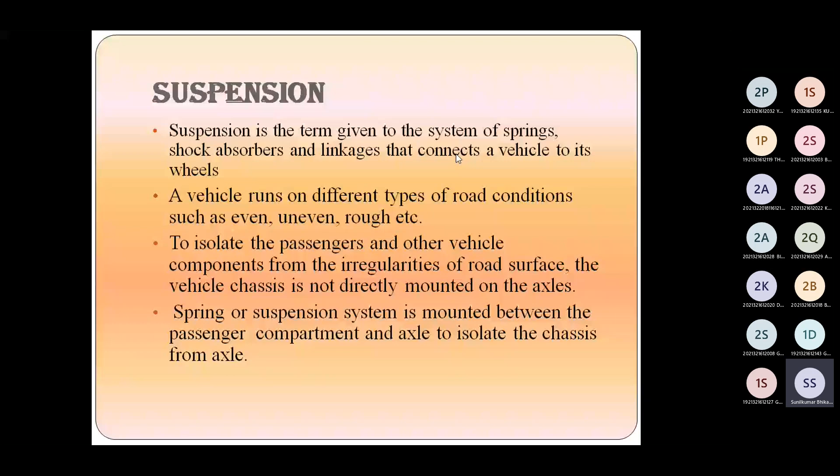In between that, there must be a suspension system, spring bar suspension system, and it is mounted between the passenger compartment and axle, because the passenger must get a comfortable ride, to separate or isolate the chassis from the axle. Okay.

Now this is one layout of the suspension system of an automobile. In this layout, as in the previous lectures we have studied the steering system: steering column, steering wheel, then at this end the steering gear, most of the time a rack and pinion mechanism. Then tie rod, knuckle arm, all those things are there.

And see over here, the suspension system. Here a MacPherson strut type of suspension system is shown. We'll study one by one the different types of suspension systems used depending on the type and application of the vehicle. MacPherson strut is an independent type of suspension system that we'll study very soon, this lecture or next lecture.

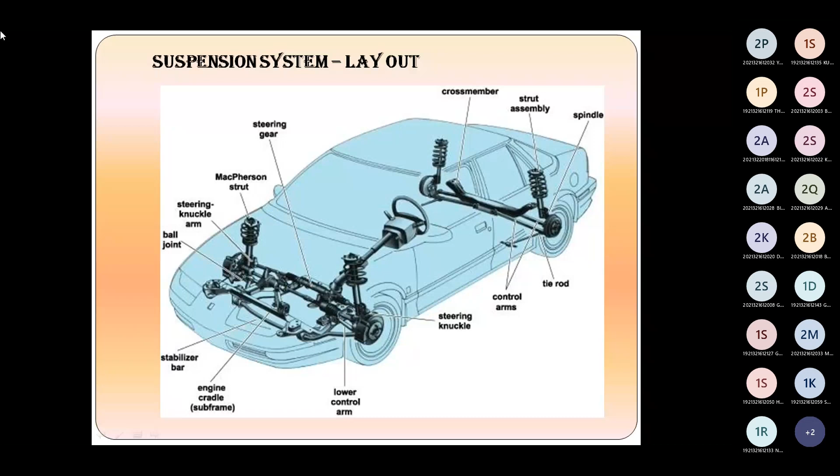Now, if the vehicle runs on an even, regular or perfectly flat road surface with no irregularities or obstacles, suspensions would not have been necessary. But roads are not always flat.

According to Newton's laws of motion, as you have studied, all forces have magnitude as well as direction. So the forces that occur possess magnitude as well as direction.

As you might have experienced, when you take a ride in a vehicle and a bump occurs in the road, what happens? It causes the wheel of that automobile to move up and down perpendicular to the road surface. So because of this uneven road condition, the wheel moves up and down perpendicular to the road surface.

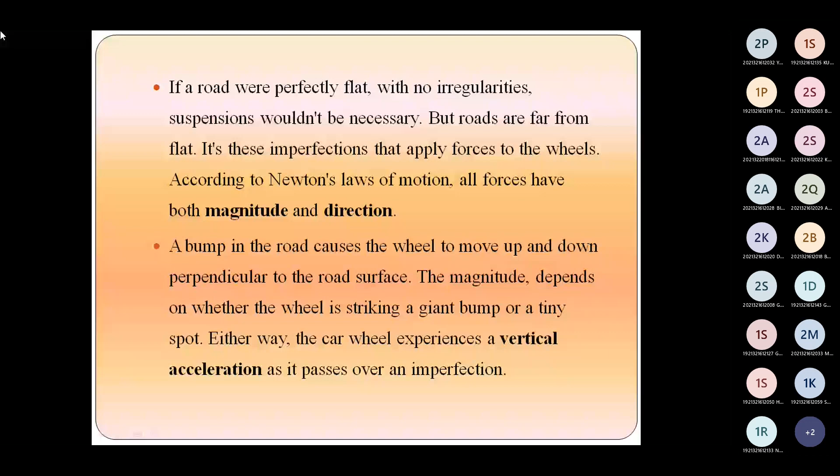Now see, this is the road surface over here. This I have got from How Stuff Works. You can check this website, How Stuff Works. There you can find various interesting topics covered with the help of PDF and some animations also. So our normal road is shown in this first case.

This is the road surface. Now this is even road surface, but whenever a bump or a speed breaker is there, the vertical movement of this particular wheel will be there. So here a dotted line is shown and here an even road surface is there. So this wheel is traveling in between these two areas, this height, normal height and road surface.

But whenever a bump occurs, this wheel jumps vertically up, then in horizontal direction. Afterwards, when it comes downward, see here horizontal acceleration is shown. Whenever it crosses this bump, the vertical acceleration will be there.

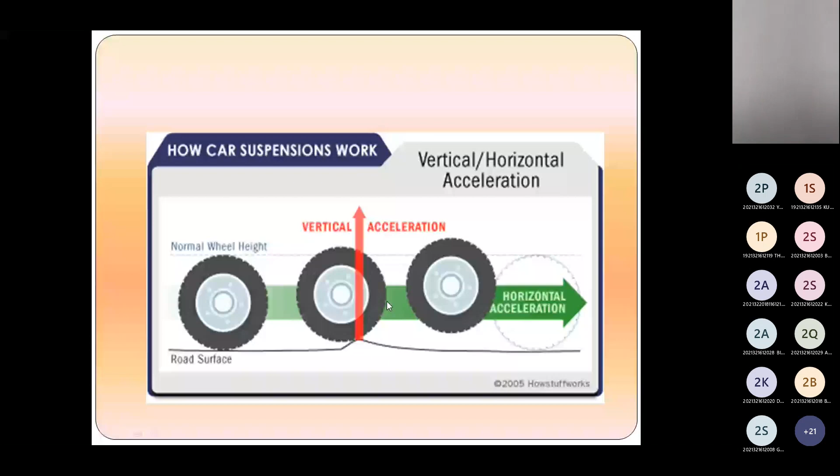Now, why is this suspension system incorporated? This suspension system is installed to give safety to the passengers. The persons or occupants, when traveling through a vehicle, because of uneven road condition, imperfections, and irregularities, the road produces shocks and those shocks get transmitted to the occupants inside that automobile. So to give safety, protection, and a comfortable, smooth ride, the suspension system is installed.

The next objective is to avoid or prevent the road shocks from being transmitted to the vehicle frame and other components. If the road shocks are not properly absorbed, there are chances the frame could break. So damage will be there, and if the frame gets damaged, there are chances of design failure and accidents. So the road shocks that occur during the ride on uneven or irregular surfaces, being transmitted to the vehicle frame, are minimized or prevented.

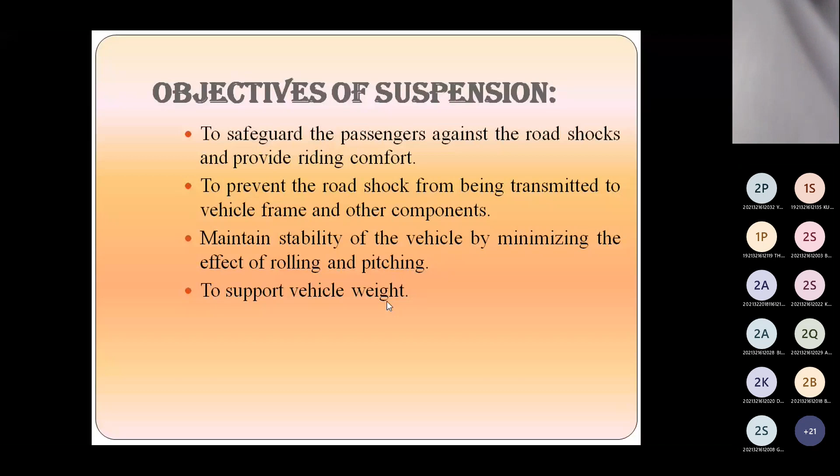Now there are three particular terms: bouncing, rolling, and pitching. This word bounce back, I hope you are familiar with it. So what happens in bouncing, or how will you define this bouncing phenomenon, this term bouncing?

When a vehicle moves on an even road surface, and all of a sudden it comes across a bump, a speed breaker, or a pit, or depressed land, or lower side road, then it is subjected to vertical forces. Different types of forces are there depending upon the road irregularity. So depending on that, either tensile force or compressive force will be there, and because of this, the vehicle starts vibrating.

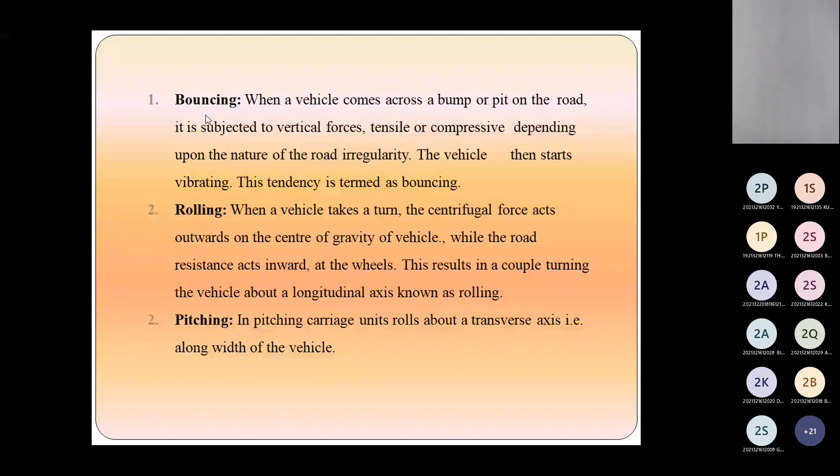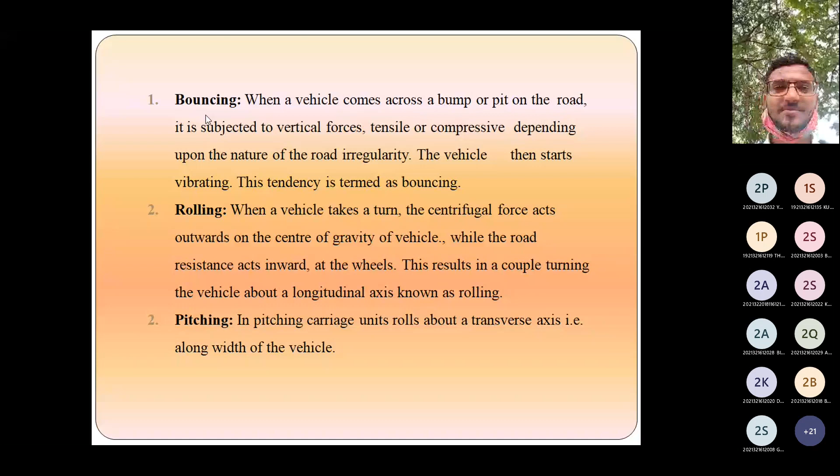You might have experienced this whenever a vehicle passes through a speed breaker, where patches are there, and when the driver moves that vehicle without lowering the speed, tries to run it as usual with normal speed, then you may experience these vibrations in the automobile. This particular tendency is known as bouncing.

Now second is rolling. Rolling is related with the vehicle whenever it takes a turn, either on left side or right side. When a vehicle takes a turn, the centrifugal force acts outwards on the center of gravity of the vehicle. Two forces are there, centrifugal as well as centripetal. The centrifugal force acts outwards on the center of gravity, and at the same time the road resistance acts inward at the wheels.

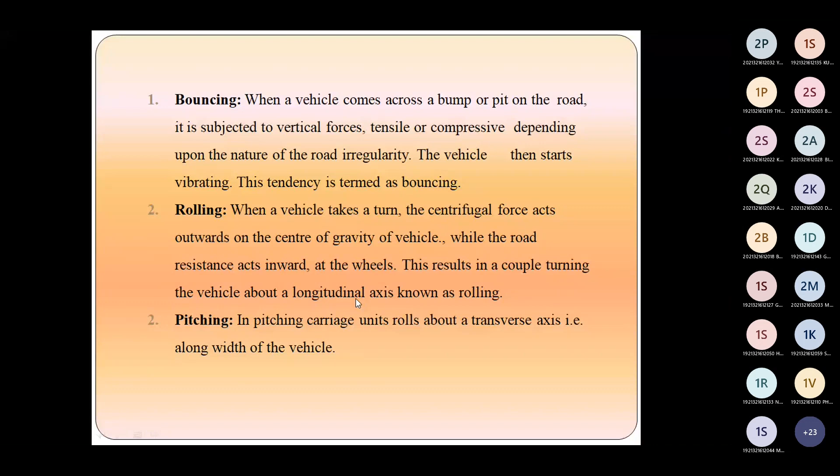What happens because of these two particular movements? This results in a couple, turning the vehicle about a longitudinal axis, and this is known as rolling. When a vehicle is trying to take a turn, centrifugal force as well as road resistance come into action, and because of these two things, a couple is produced about the longitudinal axis, that is known as rolling.

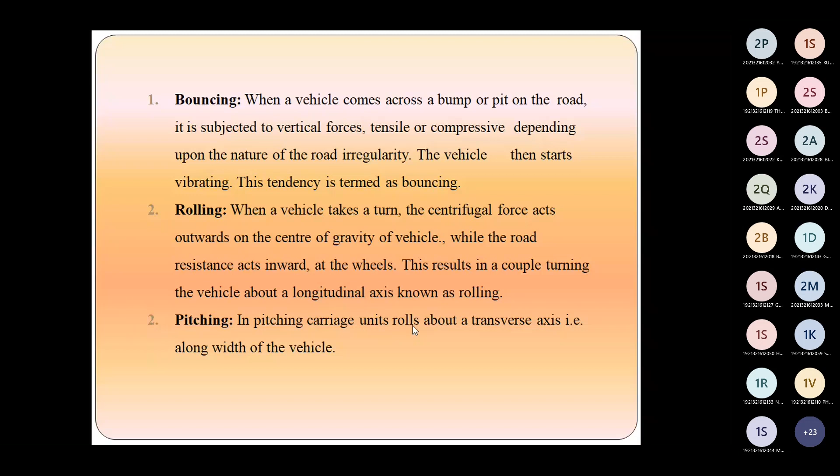Now pitching. The vehicle or carriage carrying the passengers or goods is known as carriage. In the pitching phenomenon, this automobile rolls about a transverse axis. In the earlier case it was a longitudinal axis, now it's a transverse axis, meaning along the width of the vehicle. So this is pitching - rolling taking place about a transverse axis, along the width of the vehicle.

So these three terms you have to remember, because in interviews or vivas in mechanical engineering, you will come across these three terms - what is rolling, what is bouncing, what is pitching. At that time you should be able to draw these sketches and easily explain what exactly is happening in these three phenomena.

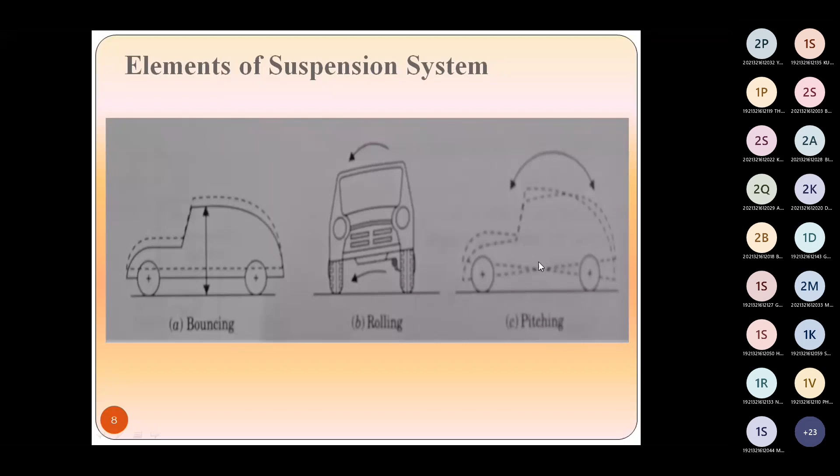So these are the elements of the suspension system. A few more are there, like sprung and unsprung weight. This definition also you will have to remember. The total weight of the vehicle, the complete weight, consists of sprung weight and unsprung weight.

The sprung weight is the weight supported by the spring. Whatever weight is on the upper side of the spring is known as sprung weight. The unsprung weight is the part or weight that is not supported by the springs. It includes the weight of the drive axle, axle shafts, wheels and tires, because all those things are on the lower side of the springs or suspension. This unsprung weight is kept as low as possible, because the roughness of ride increases as the unsprung weight increases. So we have to keep this unsprung weight as minimum as possible.

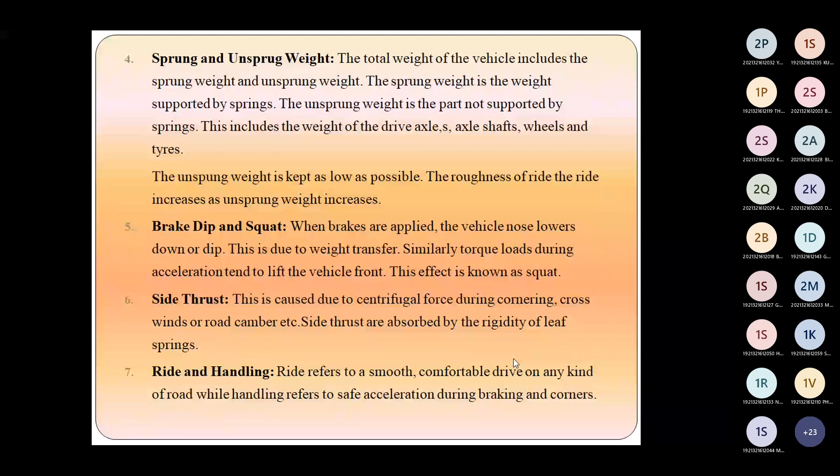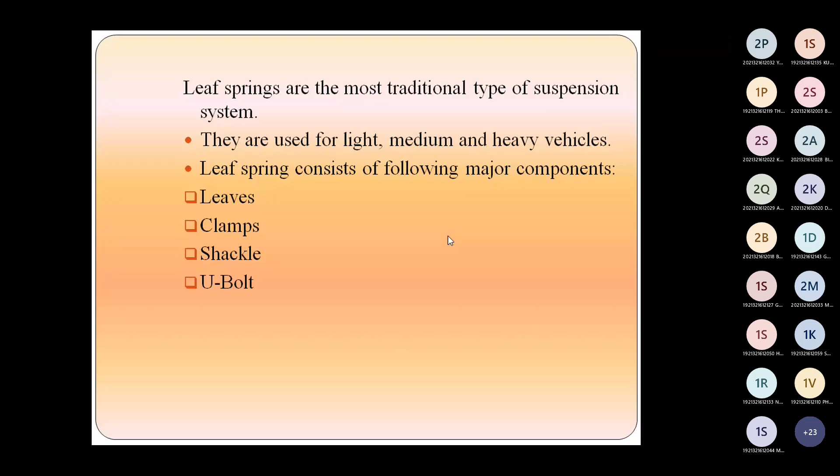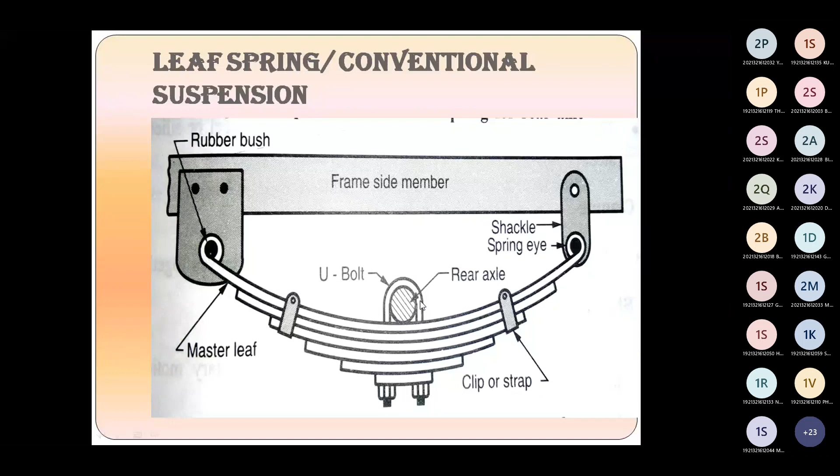Now come to the independent suspension. The name itself is independent. So what is the significance of this word independent? What is the significance of independent? Can anyone tell?

Yes. The name itself, independent, means whatever suspension is being provided on all the road wheels, those are connected to the frame, because this suspension is attached to the frame. So whenever rise and fall is there, it will not have any effect on the others. Each one will act independently.

So rigid suspension is totally different and independent suspension is totally different. In rigid suspension, if any bump or any kind of obstacle comes, then the other suspension or other wheel will also get affected. But in case of independent, it will not be like that. Only that wheel will experience the particular obstacle, uneven road surface or any kind of pit.

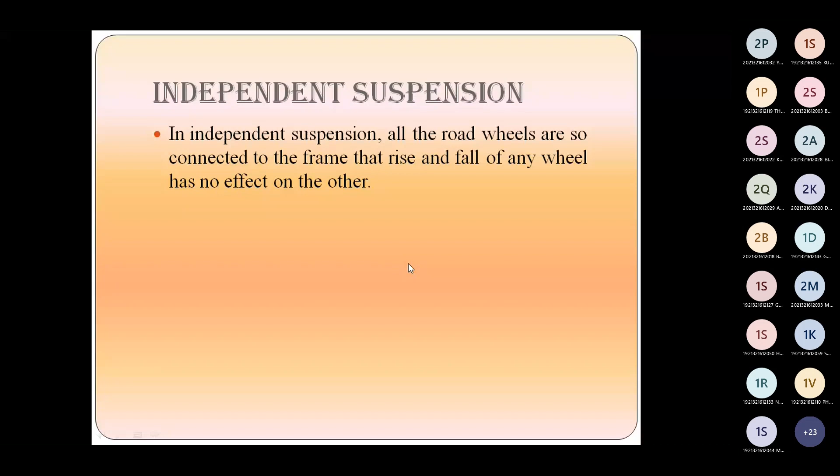Now, in automobiles, most of the time we will find this wishbone type of suspension is used. The structure of this wishbone and all these particular systems are available in our lab, in the museum. So whenever you will be there in college, hopefully after Diwali, I will show you this wishbone, MacPherson strut, leaf spring, and all those things. So today we will just see

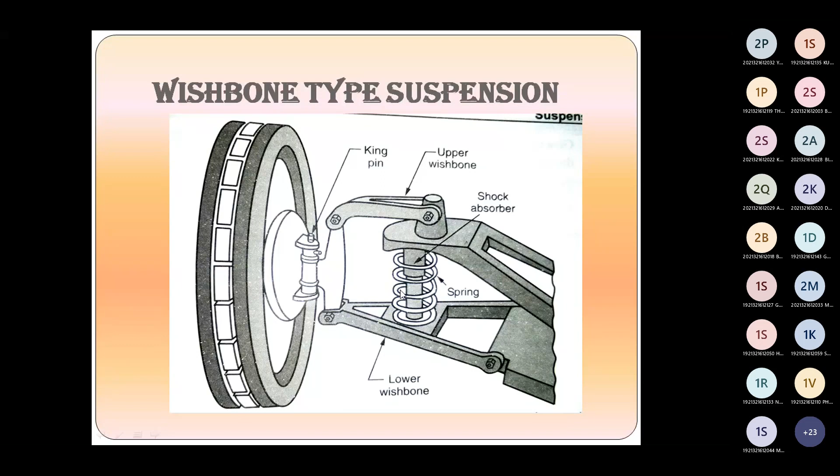See, the shock absorber is here and the spring from outside. So whatever forces, road resistance, is coming, both are experiencing those things. So the shock absorber and spring both must be in working condition to absorb the shocks produced by the uneven surface.

What exactly does this wishbone type independent suspension system do? It resists up and down forces which are developed after a hurdle, after a bump, after acceleration, or when brakes are applied, as well as when a turn is to be taken. So all those things are resisted by this wishbone type of suspension system.

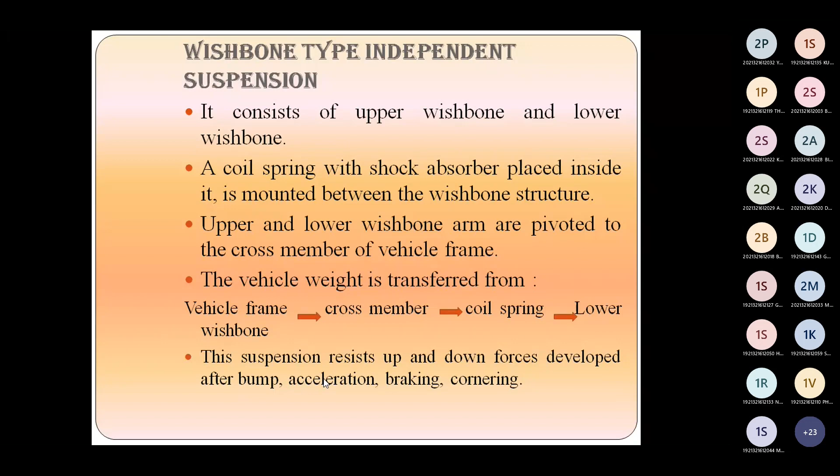Then a lower wishbone arm is there, which is attached or hinged to the cross member of the frame. Whatever load is there is transferred from the body member to the strut, to the stub axle and lower wishbone arm.

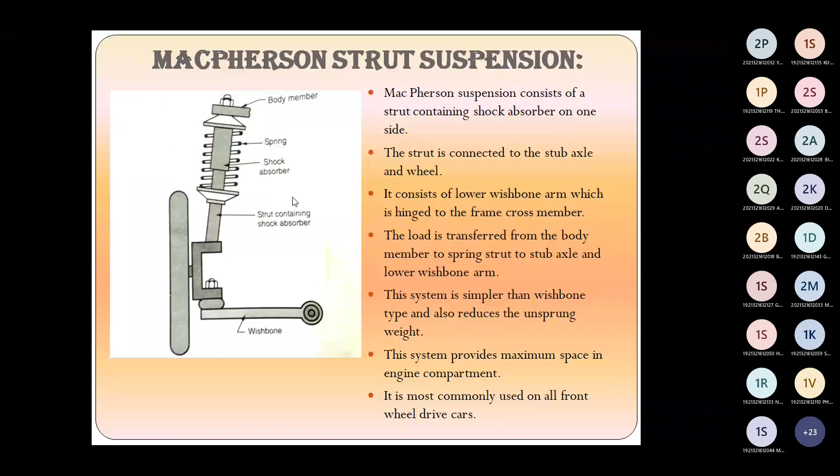Okay, so we'll stop now. MacPherson strut structure, that's fine. We'll continue with the trailing link, then air suspension and other types of systems in the next lecture.